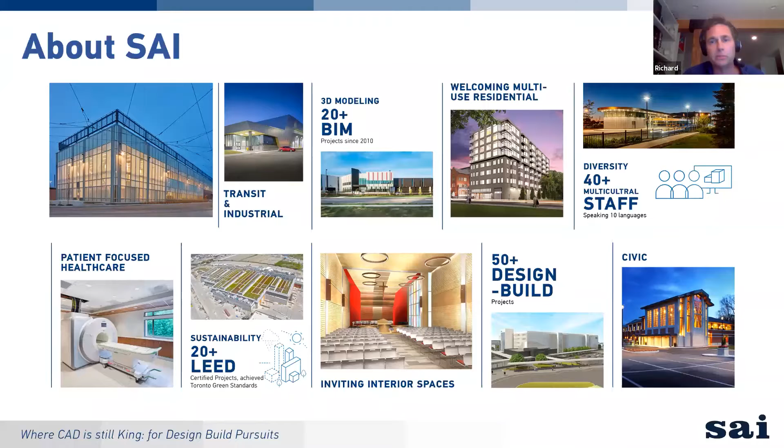Before I do that, a quick introduction into the firm. SAI is a firm located in Toronto, about 40 staff. We work across all sectors: academic, offices, interiors, civic, multi-unit residential, worship, healthcare. But we really have developed a specialty in transit and transit infrastructure.

When I speak about transit and transit infrastructure, it's not just the public side, although we certainly engage in stations, and we'll be looking at a significant station a little bit later, but also the back of house infrastructure projects: the maintenance facilities, the operational hubs, where you maintain, develop, build, assemble, and run a lot of the vehicles that enter out into the network. So it's less of a public interface, and these buildings become complex engineering buildings with stringent operational requirements. These are large buildings and significant pieces of civic infrastructure, and that's where we do a lot of our work as well.

In terms of our engagement with BIM, we've been using BIM for the last 10 years, which I know is less time than a lot of firms out there, but we really have drunk the Kool-Aid and engaged in the Revit world and in BIM project delivery. It is a significant portion of our project work, about 70 to 75% of all of our project work is delivered in Revit. So it really forms the culture of the office and our capabilities.

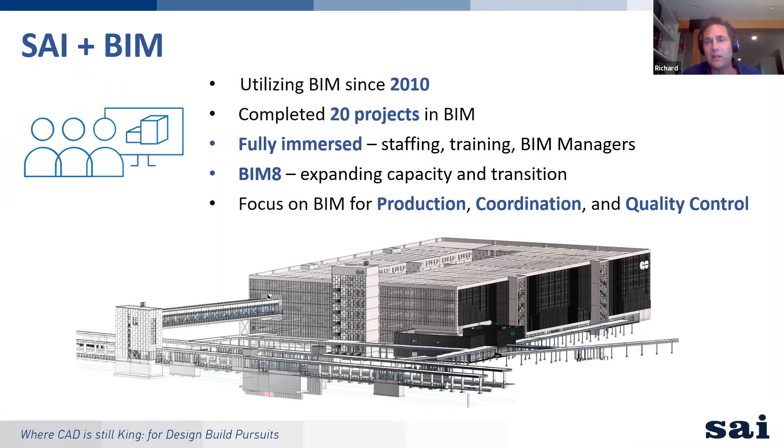About 20% is actually in MicroStation, which is a unique delivery tool specific to TTC and some municipalities that require it. The remaining 5 or 10% is in CAD, and of that, the majority is actually in the design build pursuits. So this is what we want to look at: why is that last little component clinging on in an office that's otherwise driven by the benefits of using Revit?

The other side to it is design build. We like design build; it's part of the culture of the firm. We like partnering up with contractors, proponent teams. It's a very engaged, shared risk philosophy that we like to engage in. We like these types of projects because it fits into the culture. Our approach, we're not heavy-handed designers, but we like to participate in the design aspects of that infrastructure, and it suits us very well.

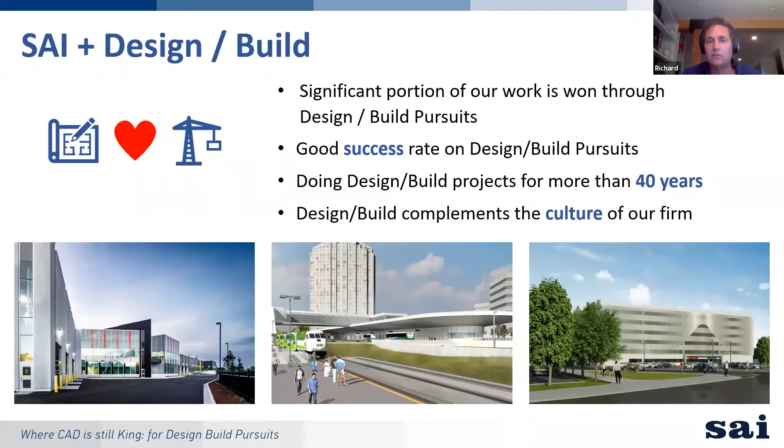Some of the key projects I want to highlight are major infrastructure projects that were actually developed on CAD during the pursuit phase, and then moved into Revit for subsequent project delivery. This is the TTC McNicoll bus garage, which just recently hit substantial completion.

It's a 300,000 square foot maintenance and storage facility, about $150 million design build, completed with Butcon Eastern. It's unique for a couple of reasons. One, it's for the TTC, and it's one of the first design build projects that the TTC has actually engaged in for buildings, so the delivery method was unique for them.

Secondly, it was the first project they actually delivered in Revit. As I mentioned, MicroStation is the preferred method by which they deliver all of their TTC work, engineering and architecture, so this was a big step forward.

The Kipling Mobility Hub is a large bus terminal integrated with the TTC subway station, and also the Go Transit station, as you can see in the image. It includes pedestrian bridges, tunnels, and platforms, and it's about $100 million.

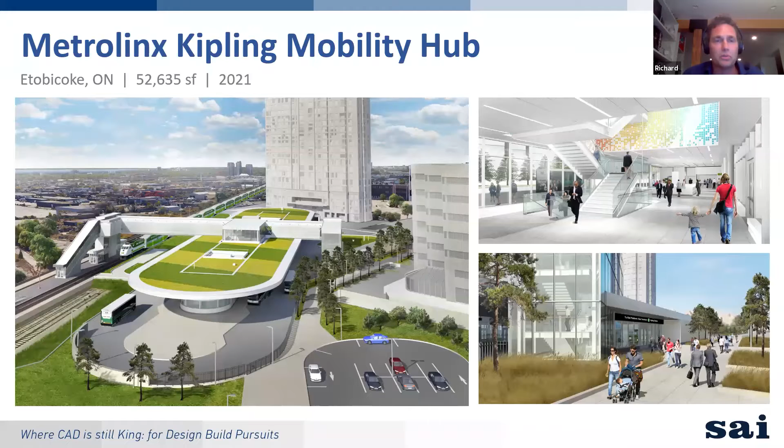Again, a design build, but with EllisDon. This project must be nearing, I think it's very close to substantial completion as well.

And then the Metrolinx Rutherford Go Station, this is something we're going to be talking about as our case study. It's a $240 million design build finance project with EllisDon, part of the Metrolinx Regional Express Rail expansion on the Barrie Corridor.

It's a significant project for that corridor, and it's starting to open up their two-way, all-day service along that rail corridor, connecting Toronto and Barrie at the other end.

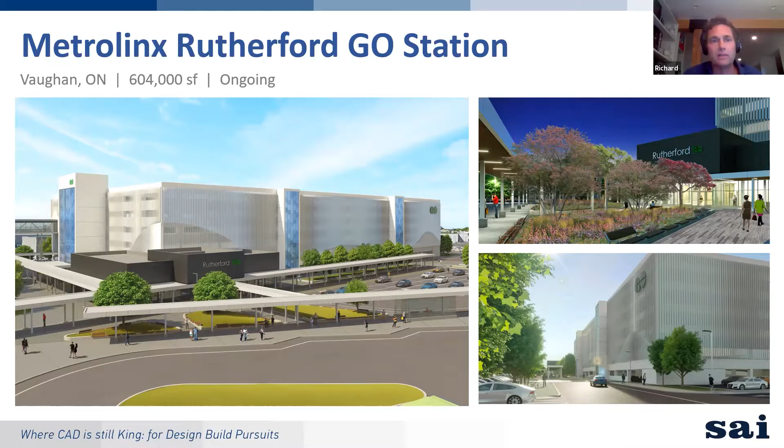So a quick primer for anyone not familiar with the design build approach - what does that actually entail? I'm going to focus on design build in transit. It's usually a contractor-led proponent team. The contractor generally assembles the individual consultant team members. The architect's not always, or even usually, the prime consultant.

A lot of that has to do with the fact that these projects are very heavy on infrastructure - track work, civil, roadways, utilities. So the architect's role in that, we are often in the role of a sub-consultant. We're not necessarily driving the process, and you can sort of see that on the org chart - we're down there on the fringes.

The process starts with an RFQ, or request for qualification. Teams are formed, usually 3 or 4 teams are shortlisted, and then an RFP is issued. That RFP contains a reference concept design, which is a set of drawings and specifications used to define the project and represent the owner's requirements in essence, and also a critical one - the project specific outline specification.

I'll be mentioning the RCD and PSOS as we go. These are almost the letter of the law - they supersede all aspects of the contract and determine compliance for the submission set.

Usually the design is developed to about 30%, typically as defined in the RFP documents, and it's also very prescriptive on the specific drawings required. We're usually taking it up to the end of design development, generally, though some elements may be developed a little further in support of the costing requirements.

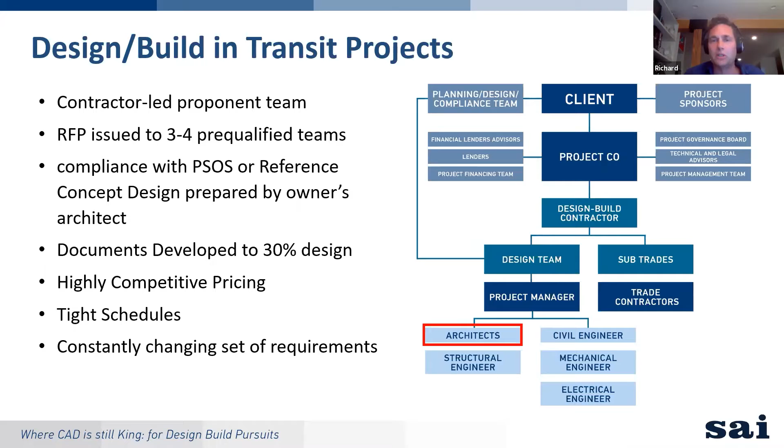All of this results in a process riddled with changes that come from the contractor and changes that come from the owner as well. I'm certainly not implying that Infrastructure Ontario is an evil empire, but sometimes in these processes it does feel a little one-sided. As a designer, you're seeing a lot of changes come out of this process - the rules are constantly shifting underfoot, so we have to be very nimble in how we deliver the project. This really comes into play, especially on transit, where it's never just a standalone site.

So what does that mean for the contractor? He's really driven by two prime factors: is our design compliant, and what does it cost to build? These are the two things they're on the hook for when they finish that pursuit phase, because they have to be as accurate as possible with that cost, and they have to know it's compliant with the PSOS and the requirements of the RFP. Otherwise, they won't get through. These are the two winning factors.

So from the architect's chair, what does that actually mean in determining our decisions and how we actually engage Revit or AutoCAD?

Because it's a competitive process, it's actually done at cost. And when I say at cost, it's usually a reduced staff rate. You take your staff, assign them to the project, their multiplier is determined and negotiated, and it's in essence at cost, with an understanding that you're deferring your standard rate until success. So all of that additional fee is at risk during the pursuit phase. This is pretty standard, all the consultants go through this. There's a small honorarium, but it's never enough to cover the project. The client isn't paying for this process—ultimately the contractor and consultant teams are.

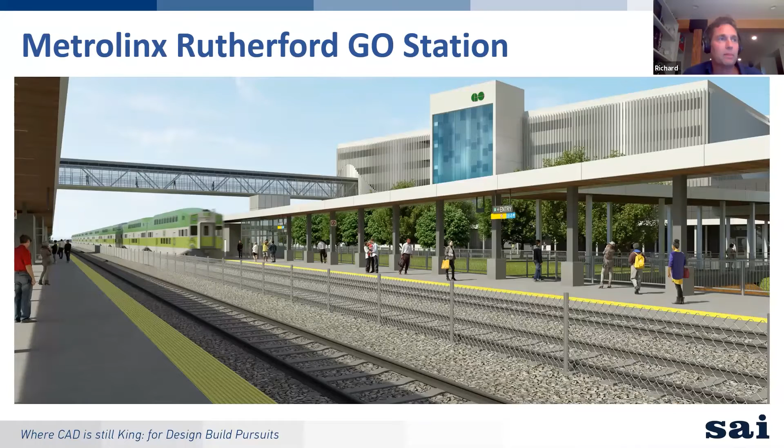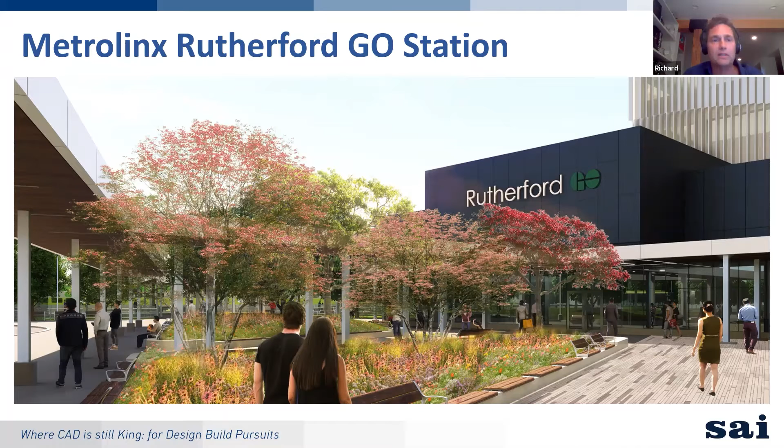You can see this view here, the structure in the background with the overhead bridge and the rail platforms. The station plaza integrates the actual GO station itself with the open landscaped area. What you start to see is that there are a lot of little components all across the site—architecturally, many small building pieces that need to be coordinated, with a mind to the detailing on each one. This is actually another little bridge approaching the rail platform.

So how do we manage? We've got to deliver that project—is it CAD or Revit?

This chart, I'm sure you've seen this graph before—it's based on the MacLeamy curve, looking at the tooling up and modeling time for Revit at the project onset. This chart was generated for an IPD project delivery, very integrated into Revit development. In essence, it's intelligence and information at the onset to deliver value and coordination through the later stages of the project, where the impact of design changes and related costs grow exponentially. So you can see the difference between a traditional design—drawn up in CAD—versus Revit.

This is how we engage most of our projects, and we do see the value in this. We have recognized that

it does work, especially with the Revit platform, with modeling and BIM. But for the pursuit phase, what you're seeing at yellow is our resources at risk. So this is, again, all of our time and investment in there.

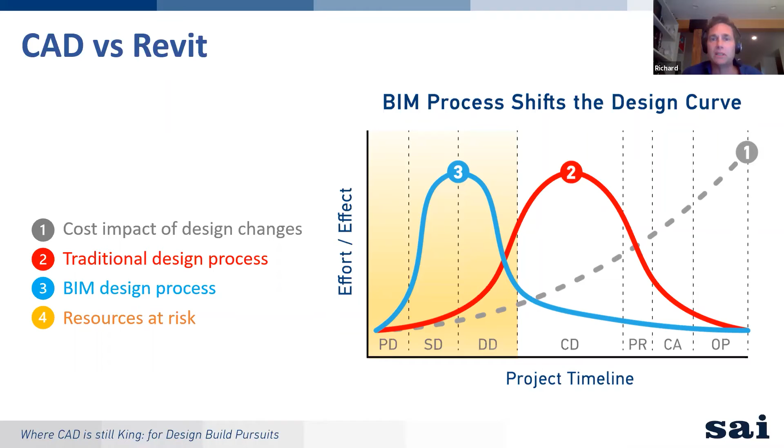So really we need to get the most value out of that initial phase, not assuming that we're going to lose, but being able to balance that with what we can do once we win it. So it's really about risk management at that side.

So design documentation, what tool is best for the job? Although there are many factors that come into play, we really found that there are three main drivers in this decision when it comes to transit design build.

First and foremost is getting started. It's how fast can you get off the ground and get the team working. A lot of that is a site and base plan. Everything that mechanical, electrical, structural, civil, everyone that needs and depends on this information at the onset, how fast can you get that going?

Second is the assumption and the knowledge that there are going to be many major owner and contractor driven changes during the pursuit phase, that nothing will sit still. We have to test it. We have to try out options. We have to evolve the design, and really we have to explore what the project can be, with an eye to: is it the best possible design? Is it compliant? And is it the most cost effective?

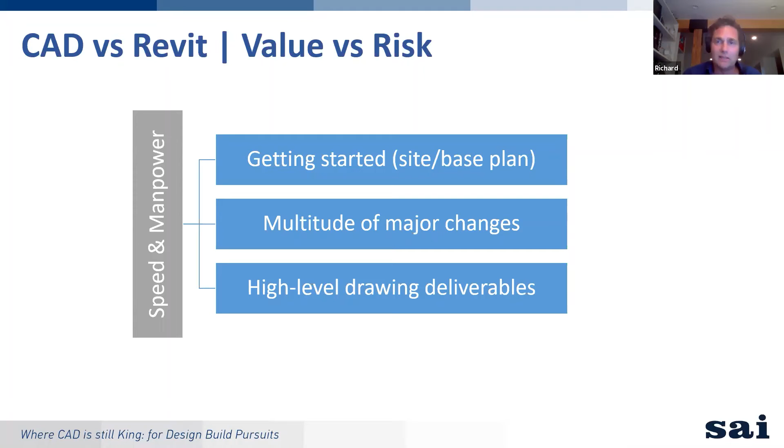And then lastly is just the level of deliverables. At the end of the pursuit phase, we know we're handing in a 25% set of drawings, and how far do we have to go with that? It's not really our decision. It's predetermined for us. We certainly know we have to support the contractor and their pricing, but really it's about what will get through that. Is it compliant, and how much does it cost to build?

and get started very quickly on moving this into what we think is the best possible design solution. You can't, in these processes, take the RCD and assume that it is all the best solution. And even if it is the best solution and you work through everything and come back to it, you still have to go through that process.

So on this site, it's a very large site. There's not an inordinate amount of architecture or building, but it is the architect's responsibility to assemble and distribute this site plan. So we're really responsible for the site layout. It's something that architects do well, organizing all of that information together.

And as you can imagine, it's a very large civil undertaking. The civil portion of this and the track work is significant. But again, it falls to us to pull it together and get that out as fast as possible.

Then there's the other side to it, which is just analysis, right? Using the tools and the documentation to test. We are ultimately designers. We want to see what it looks like. We want to see how it works. We want to understand it in 3 dimensions. We want to be able to look at it and assess that. But we need to do it very quickly and very flexibly.

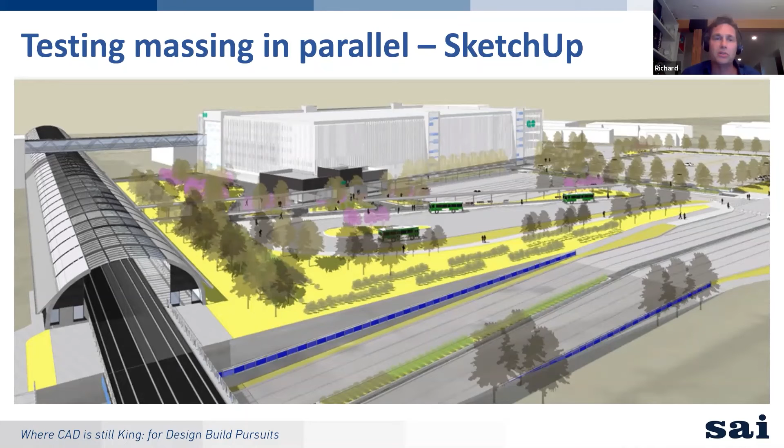The landscape had their plan done, worked with our model and dropped it on there, and it forms a very effective communication tool. We use that and employ it for presentations to the owner and presentations moving forward, and also for analysis. Throughout the process, we have to test all the layouts for compliance, for constructability, for cost efficiency, and design innovation.

We have to make sure that we are on board and have explored all the options to make this the best possible design, because we're in a competition here. So we need to be able to manipulate the layouts very quickly, distribute them to team members almost immediately, and use graphic communication tools on the presentation side. So it's got to happen fast.

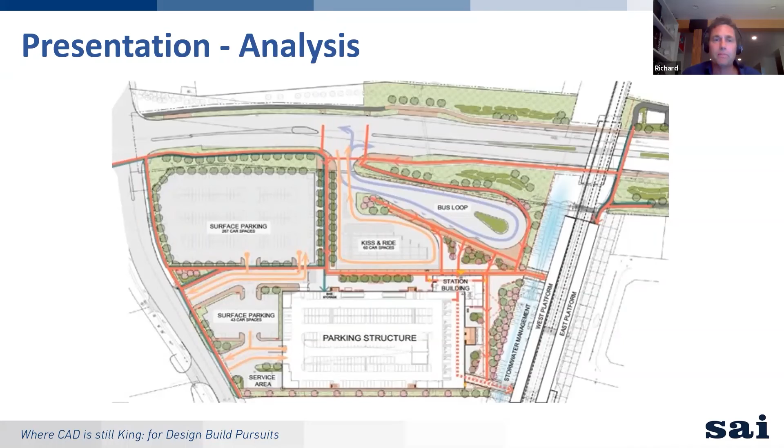So this is the final submission. This is actually what the site plan looked like when we closed off the pursuit. It was done in CAD. The other thing worth mentioning is that the contractor, who's focused on the pursuit submission at this point, retains directly all of the subs. We don't retain the subs as we might if we were prime in a different project delivery, but the subs all work for the contractor.

So they're free to use whatever medium they want. I think the contractor won't be prescriptive about this, but you've got Civil 3D for the civil works and site works, Revit for structural, they'll often engage that. I think Stevenson used Revit on this project. CAD for mechanical, electrical, and landscape is also in CAD. So what you need to find is a common language that you can export very quickly to all players and make sure that they have that base level of information, knowing that it's going to change. We're not working from the same model in these regards. It's just using it as a communication tool with speed as the driver.

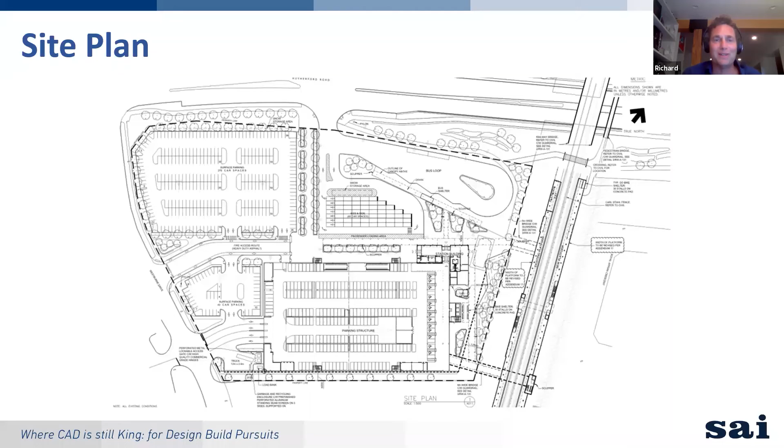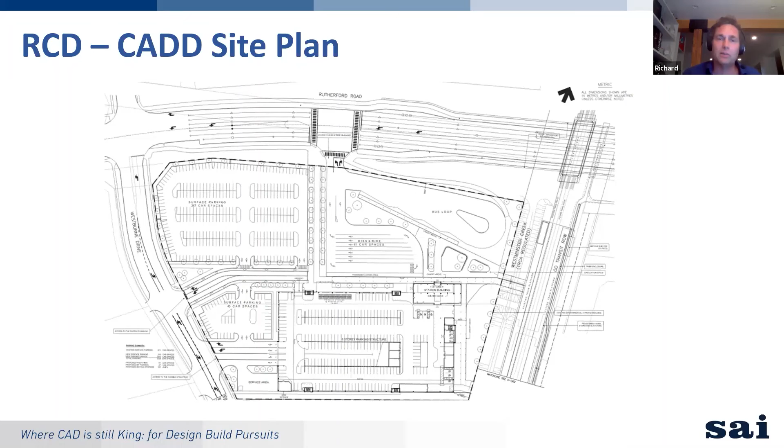So in case you forgot where you started, there's the RCD. This is what was issued, and this is where we went to. Issued, where we went. And although it may look the same, anyone that worked on it knows how different it really is. But at its heart, the level of drawing and what the actual deliverable is doesn't evolve that much. It's really all about the intelligence behind it as opposed to advancing the drawing and its information.

So in general, changes—Revit is very effective, and we find that we use it all the time to incorporate changes across all drawings, change the model. It's very good, but it's less about changes, and I think in integration and coordination, more about exploring options quickly.

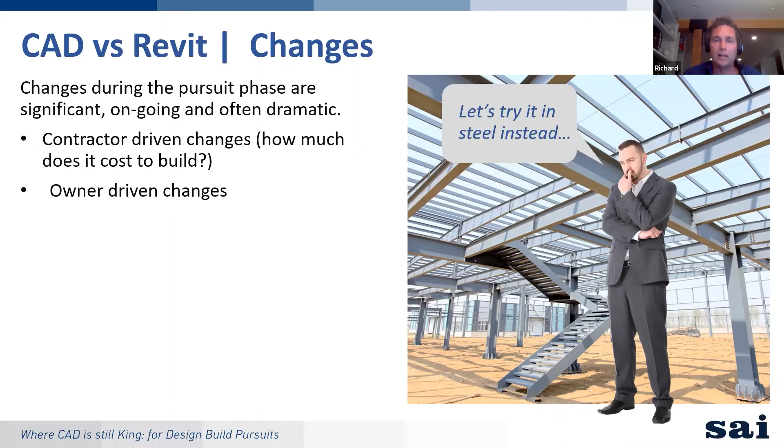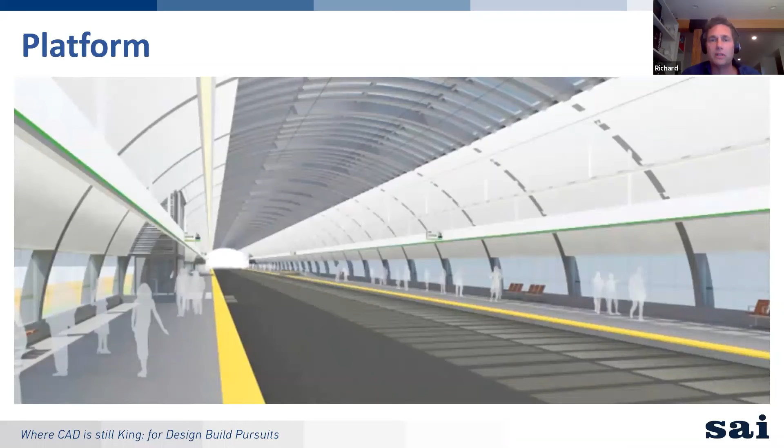So for example, an example of an owner-driven change: this is a platform enclosure at the rail side. They had it in the RCD. This is an image from the RCD. They wanted a full enclosure around both platforms. In essence, it's a 350-meter long structure that runs covering the full platform. This is what it looks like on the outside. This is what they had modeled up and issued as part of the RCD.

This is what we actually drew. Tested up the design with cross sections and then planned it. Again, very quickly, we were able to determine life safety, passenger comfort, durability. Where does the rain go? Where does the snow go? How do we actually get air in there? Will diesel fumes accumulate? So we were able to look at that and test it with the engineers.

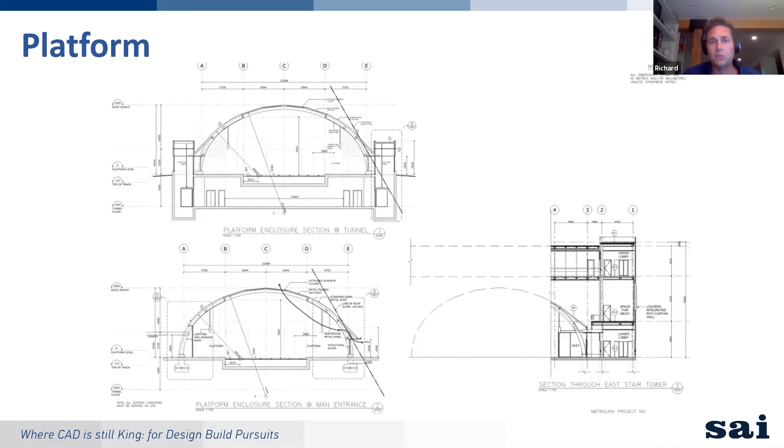Again, on plan, test the layout—very simple, very quick drawing. Then this came out in the RCD, and I haven't modified this image at all. This is issued from the RCD with those exact markups: platform enclosure, line through it. So late in the process, the addendum was issued and the enclosure was deleted. So we're mindful of how much time we would have invested in that, knowing how fluid that process is.

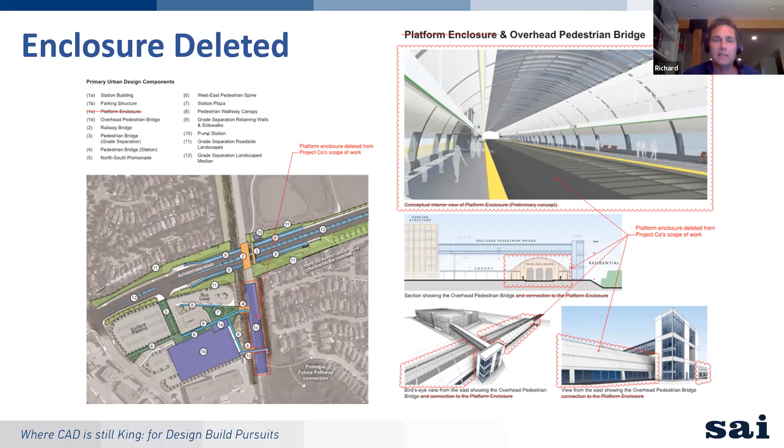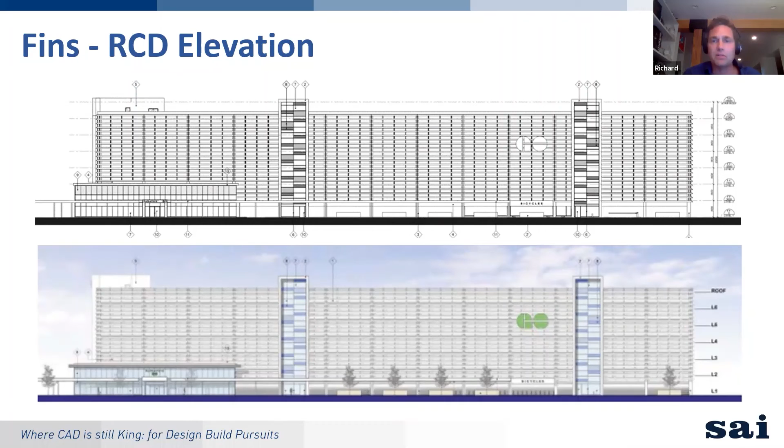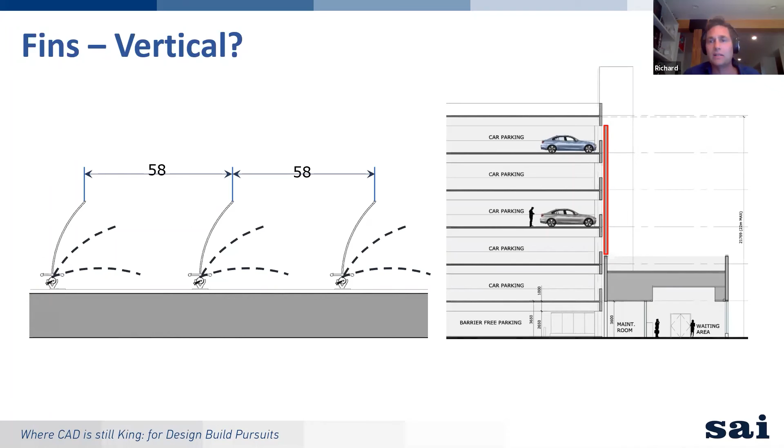So a contractor-driven change that I'm going to touch on is with the fins. Again, the RCD had horizontal fins. Very quickly, the contractor looked at it and said, that's very expensive because it needs a secondary vertical structure behind it—is there anything you can do? So we took it away, proposed vertical fins, worked with the fins and then spent attention on the fasteners, providing a modular but adjustable fastener that would work with the precast system so that we could have a dynamic facade and not have to have a secondary structure, saving money and yet also achieving the expression that the client was looking for.

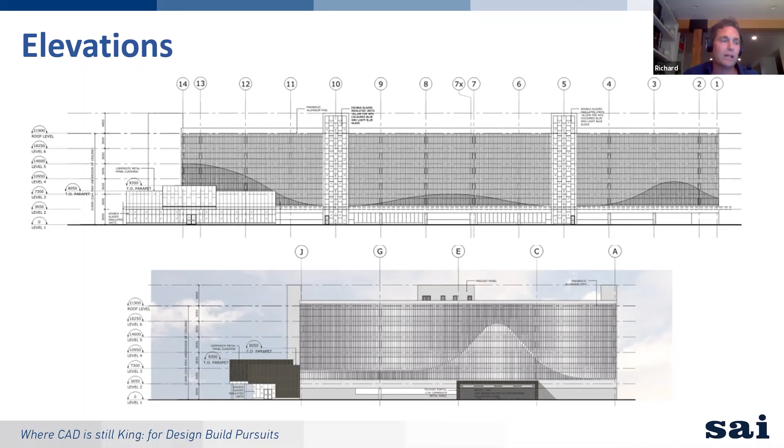So how do you communicate that? It's a fairly complex, enormous building with thousands of unique elements on it. Again, in the pursuit phase, very quickly, using a hatch, we can identify how the design works, where those lines are, and then with a little Photoshop work, how the building's going to be experienced. Testing very quickly in 3D Studio Max how the fins will look.

And then actually in the design process, after we had been awarded the project, we did model it up in Revit. At that point, we really understood how much time it was going to take to invest in that exercise and in developing that model, because we needed to have it in place for use as the generator for the shop drawings.

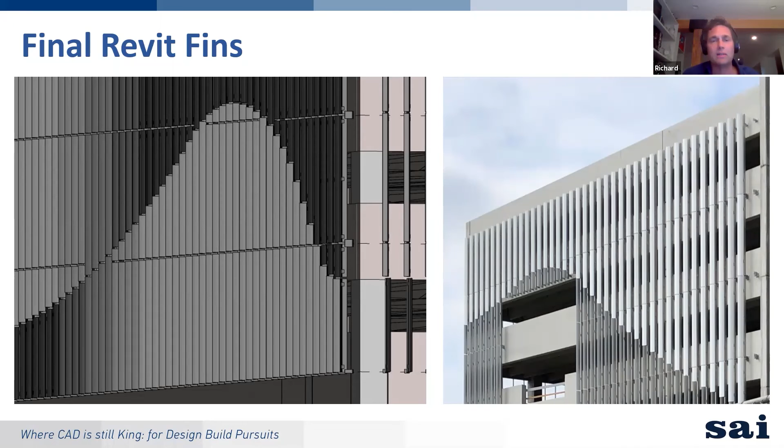And then on the right, you can see it actually installed. What does the final technical submission have to look like? This is the level of detail we have to get to — communicating the maximum amount of info with the minimum line work.

And that's not true for the whole project, just for the design build phase, the initial phase going through. Drawings need to demonstrate compliance with the RFP, and we have to take it as far as we can to do that.

Coordination is such a strength of Revit, but in the design build, it's only really reviewed and required to a certain extent, where we know it won't impact the cost of the building as we move through coordination after award. So that's really the driver there.

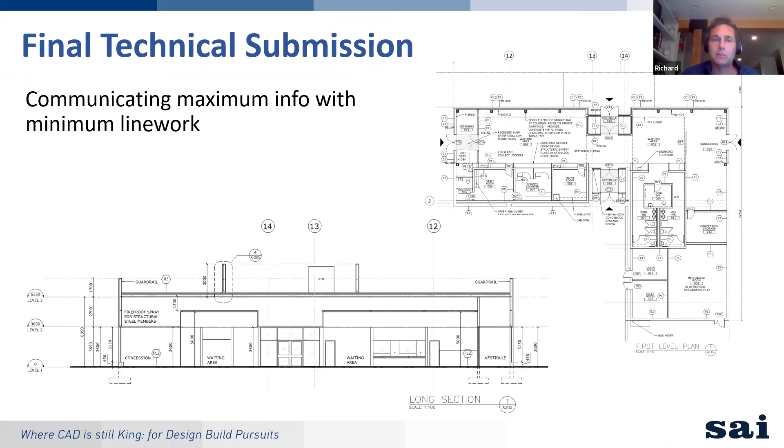And often costing information can be supplemented. You can put in specs and so forth and other aspects to deal with that.

So just because we have Revit, does it make sense to use it? We know the office has invested all this money, we've tooled up, we're engaged with the process, but how do we get through that very competitive phase? Is it the right tool for the job, or do we just feel compelled to use it because we have it and like using it, assuming we win every single design build we enter into?

So it forces the question: if this is a successful methodology using CAD and then translating to Revit, why would we engage Revit? To really answer that, we have to look at the pitfalls.

Risk versus reward. The key is, if we win the project, there will be a very aggressive schedule the contractor has agreed to in order to win it. So very quickly we'll have to move from a 30% CAD set to a 60% Revit set, in a time frame that only allowed for development from 30 to 60. So you have to not only refine the project but also make the transition between the two mediums.

So we find that's a real pitfall in this approach. Very often we end up trying to build the model in the time period between notification of preferred proponent versus the actual contract award. So it's still at risk, but it allows us the time to do that.

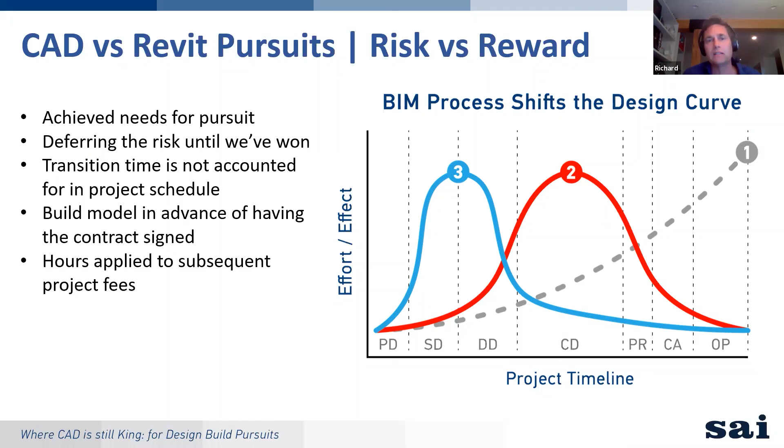But again, we see that if we could come out of the pursuit with an element of geometry or an element of Revit and BIM that we could translate very quickly, it would actually suit us well.

So how do we flatten the curve? Now, again, this is us messing with that curve — is this wishful thinking? Can we actually minimize our involvement with Revit at the onset?

Again, just targeting modeling and delivering only those elements that communicate and assist with design decisions, facilitate a 30% submission, and yet will support and bring value as you move through CD and into CA. With a design build, there really isn't a CD procurement and then a CA.

It's just construction management. As soon as the package is ready to go out, the subs are costing it all the way through, and in essence you're designing in coordination with them and their shop drawings all the way through contract documents.

So some of the things we're looking at is establishing a BIM pursuit template within the office, trying to establish model parameters with the pursuit team at the onset, even though we won't be engaging in Revit to start with.

It's how do we establish that tool or deliverable and those parameters within which we can actually model during the pursuit phase, without having to redesign or rebuild the model when the coordinate system and everything else is established after award.